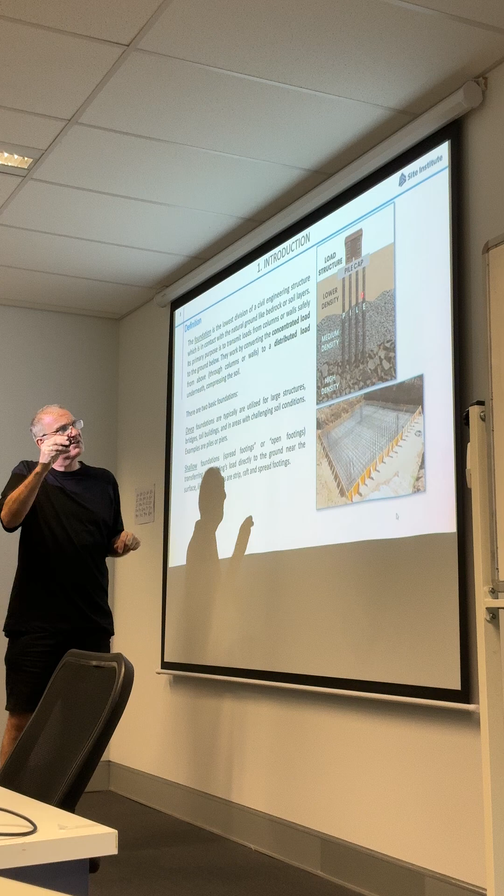And then this one itself is sitting on piles, right? And this one now reaches down to the ground. Why is that? Because when you talk about lower density, obviously when you build on sand, you know what happens with sand, right? It basically sags. It's simply not strong enough to withstand the weight. So that's the reason why you drill these holes down there.

You simply search for strong foundation layers. For instance, this one is a rock layer with high density, which is strong enough to withstand. Right? That's basically what they do with deep foundation. That's why they drill those pillars in there, simply to look for not actually soil, but mostly hard rock, and to embed your structure there.

So make sure that the load which comes from here goes all the way down through the ceiling, then through the column, down to the foundation, and then into the ground. The natural ground, of course. And of course the earth is big enough. If it's big enough, then it will hold forever.

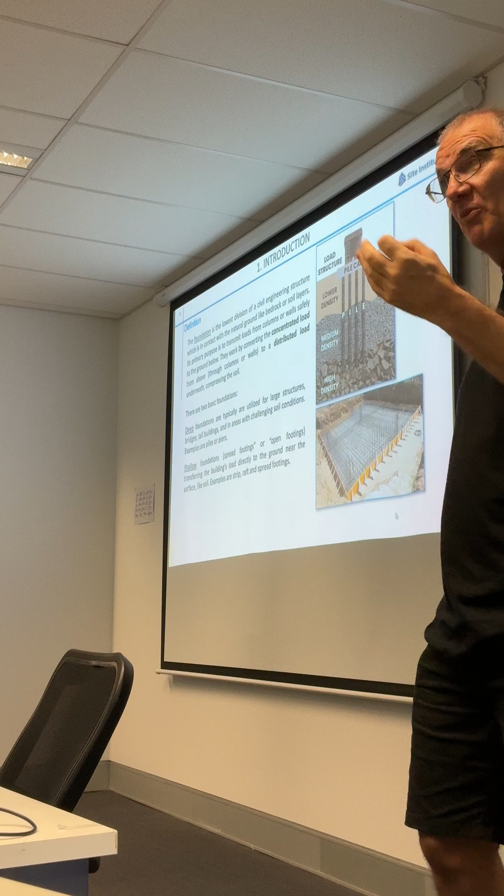I'm not sure whether you heard about that. I read the news a couple of weeks back about Manhattan in New York. There was some alarm raised that the whole bed on which all these skyscrapers rest starts to sink because of the enormous weight of all those buildings there. So it was in the news that this one actually starts now because of the enormous weight of all these structures.

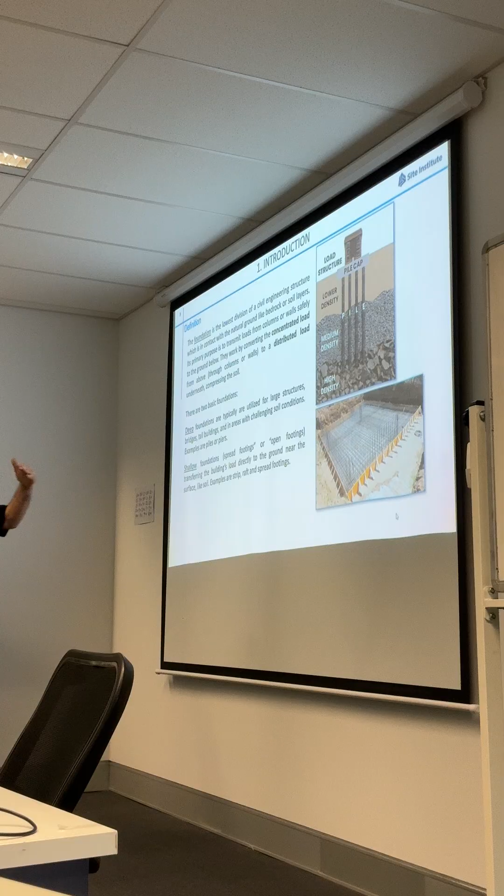And look at how densely it's built, with skyscraper after skyscraper, and they weigh a lot. And then it starts to push down the entire rock, the entire plateau on which it is resting. If you have only one building on a big area like this, it doesn't make a difference. But if you have many of those buildings, then of course it does. Because it pushes it down, on those pillars at the bottom there's a lot of pressure, because that's where the whole weight rests.

So it turns the concentrated load into a distributed load underneath. We have two basic foundations. One is the deep one, for large structures, tall buildings, and areas with challenging soil conditions. Here in Brisbane, I'm not entirely sure what the layers underneath are, but some areas are granite, and granite is one of the hardest substances in nature, which means it's very strong. So that's the deep foundation. We will not really be touched by it, because we do not have such deep foundations.

And the other one is what they call a shallow foundation, and the word says it. It simply sits almost directly on the ground, or you dig a little bit out, something like for a house, right? Or a parking space. I don't think you have any foundations for roads, right? I think you have only those pebbles underneath. So it sits directly onto the natural ground as it is. It doesn't have to be dug in. So you transfer the loads from the buildings directly into the ground.

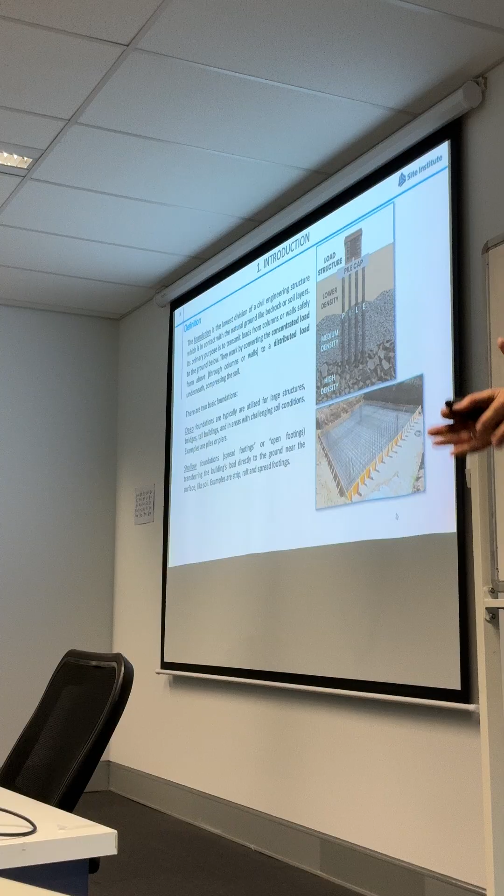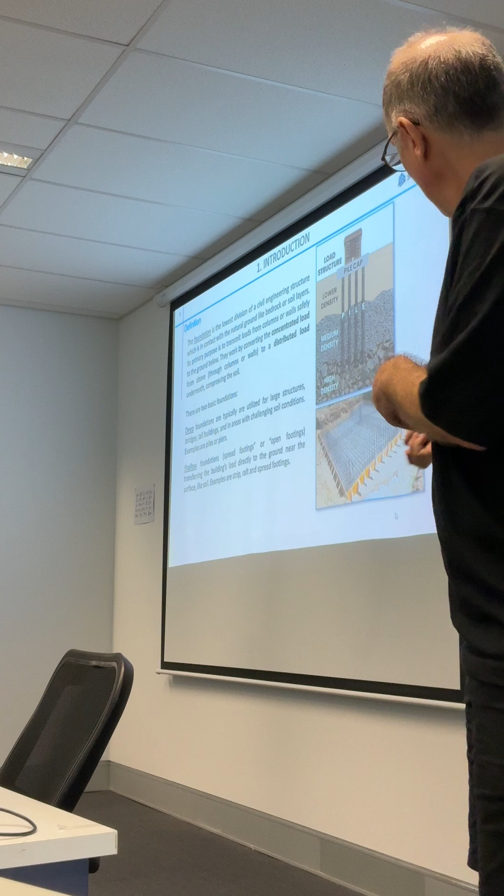And that's normally the surfaces. There could be soil, sand, the sand probably less, but any soil or ground conditions which are strong enough. It doesn't have to be rock. Because, first of all, the building is not heavy. A house, especially in Queensland, is simply timber, right? And the slab is wide, which means the load is distributed, which means the pressure generated is quite low. So you do not have really challenging conditions for the ground.

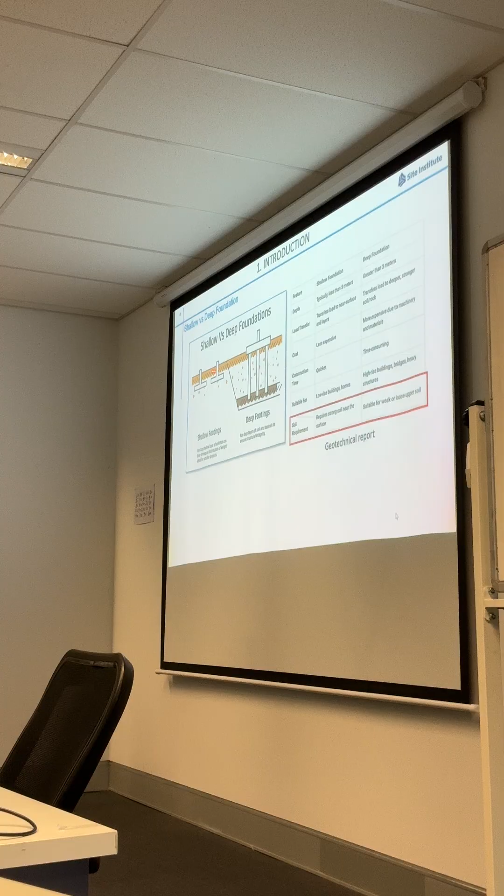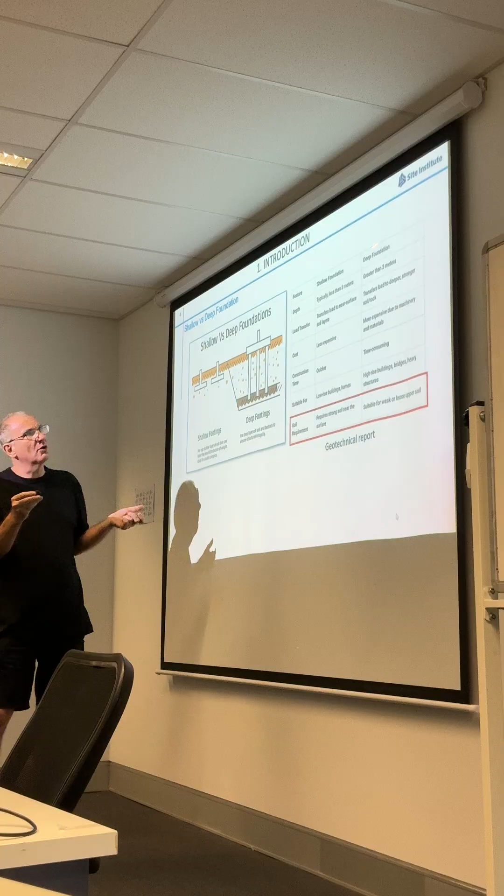So here are some comparisons between a shallow and a deep foundation. Of course, for the depths, for instance, when we talk about depths of less than 3 meters, that's what they call, I'm not a civil engineer, but what they call a shallow foundation, otherwise it goes down there. And the load transfer goes directly into the near-surface soil layers. Right? So it is mostly soil.

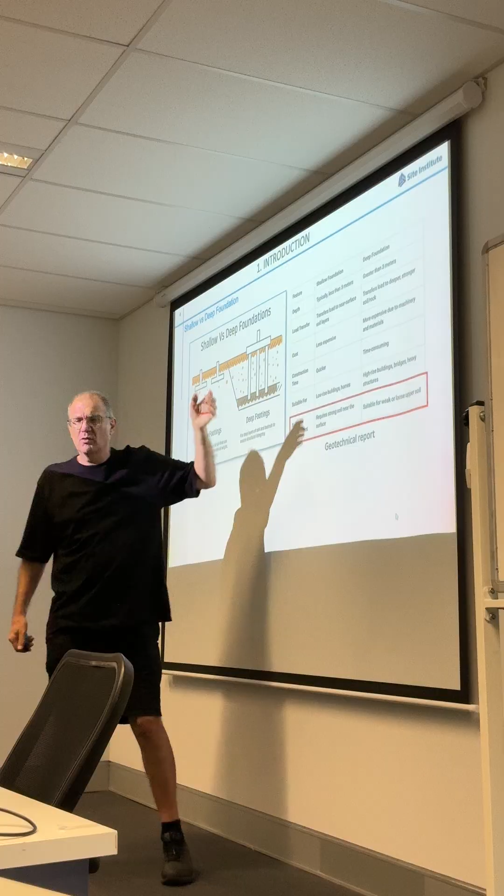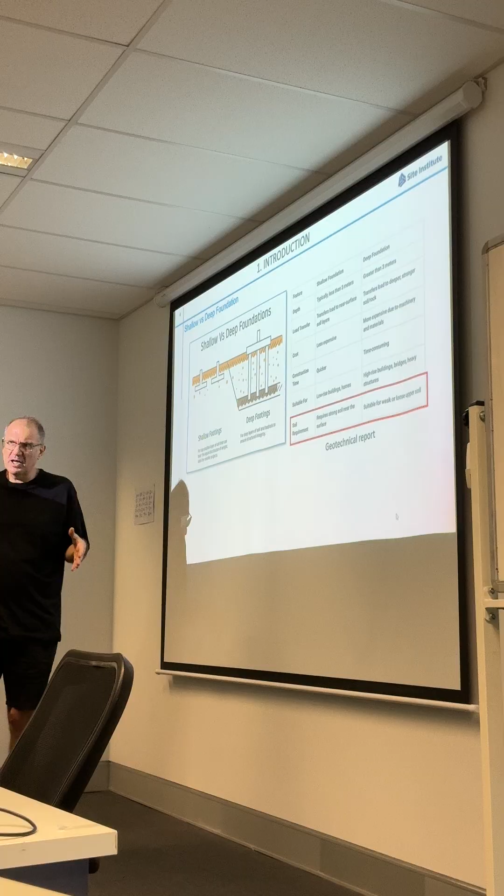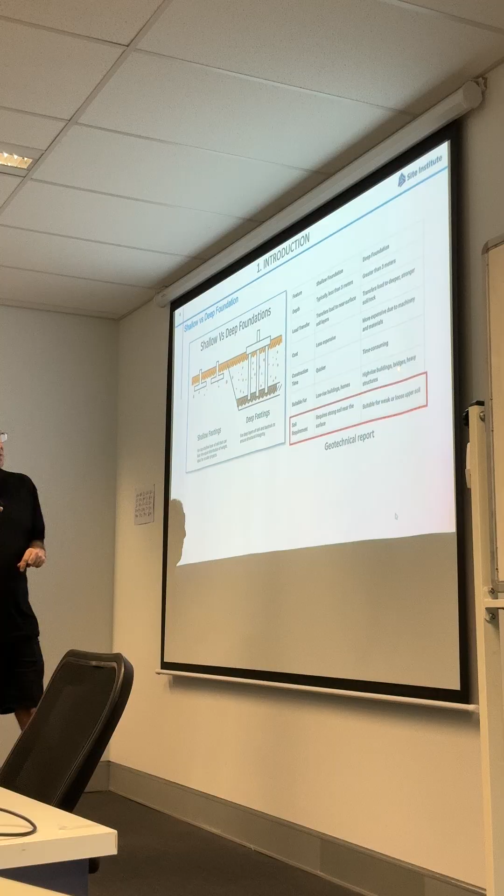And for the load transfer, that means simply from the top all the way to the ground, that is normally to rock, to rocky stuff, not soil anymore, because when you're deep down 10 meters or so, there's actually no more soil, there's mostly rock layers. Then the cost, of course, for going down is much higher. When you see the machinery you need to get down and how to make such a thing, it's much more expensive, right? And of course it takes longer because you have to drill these things.

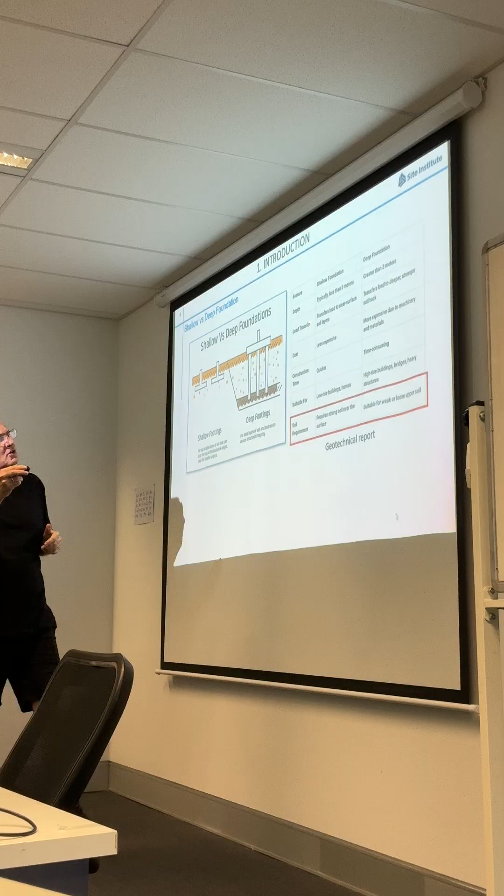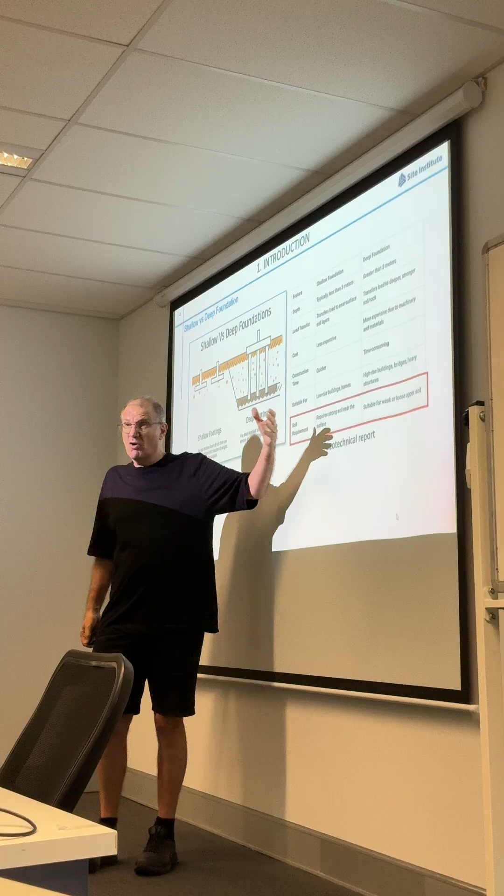Okay. So for the deep foundation, there are several types. Basically, one is the pile, which is simply a thing like this on which it sits. It's a slender column or long cylinder made of materials such as concrete, steel, or timber. I wouldn't have believed that they also use simple timber for the foundation, for such a pillar.

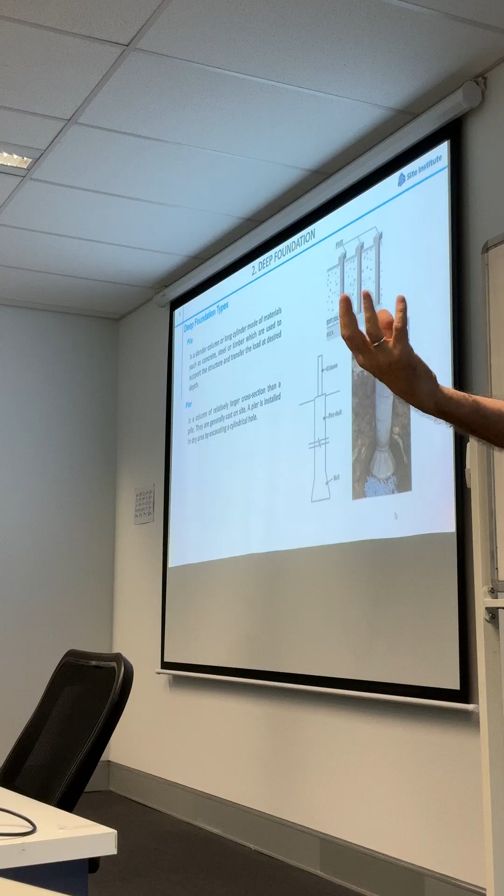And in fact, I saw them doing this here as well in Brisbane. I live north in Strathpine. They just redesigned the area, and they use some really hard timber, the timber which is also used for the electricity posts and the telephone poles. They're all made of this hardwood. This stuff is really hard. If you try to drill a hole into it, that's really challenging. It's really tough. And they use timber for making this.

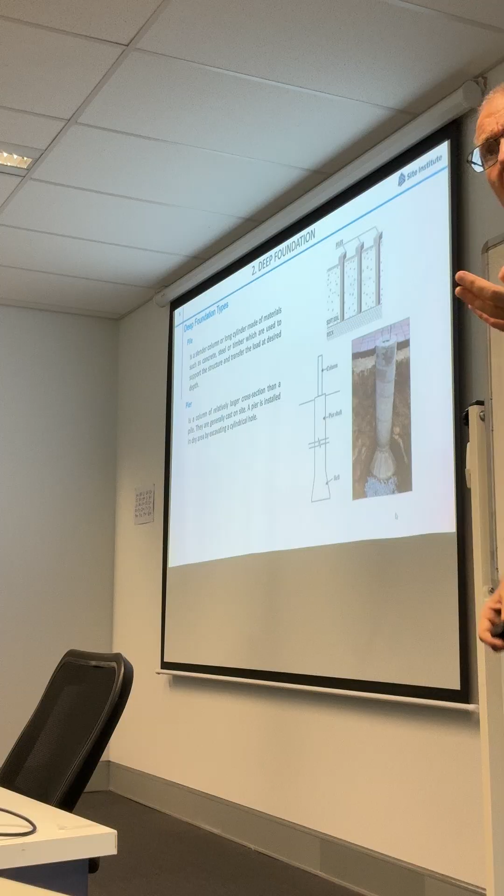Right. And it's simply because timber is quite resistant to water, quite resistant to corrosive soil, for instance. So that's sometimes why they choose timber. But otherwise, it is normally concrete.

Miriam was telling me that she did a project in Colombia where they built near the coast, where they also used timber pillars like these ones, because of the environment, especially near the water. Salt water is very bad for concrete and for steel, but for timber, it doesn't really matter. Timber is really, really resistant. You wouldn't believe it if you don't see and try out how hard that stuff is. It's amazing. This timber, especially in Australia, is amazing.

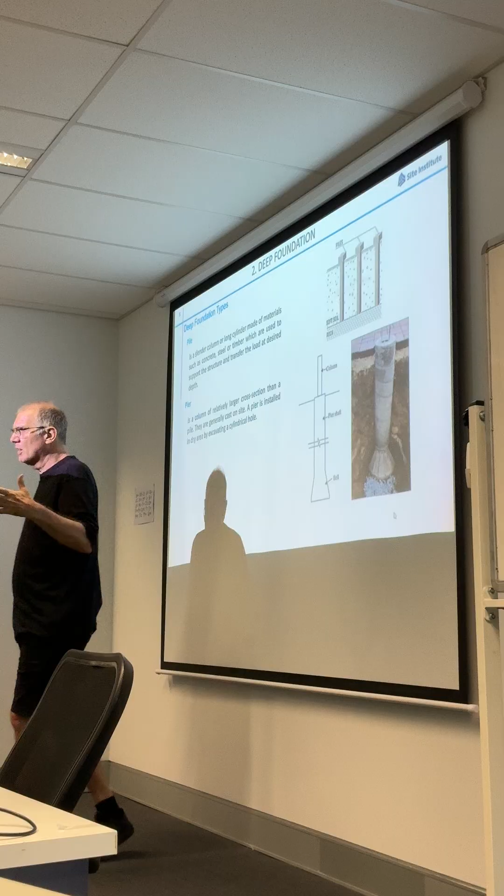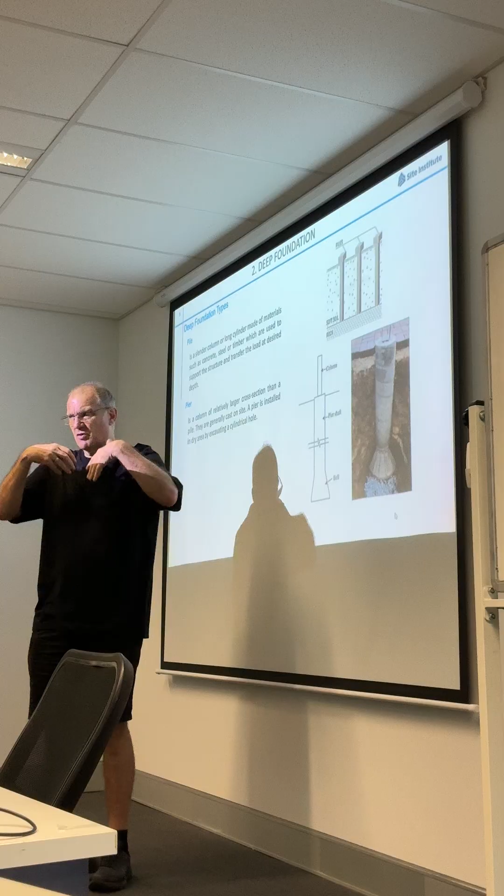So the pier is a column of a well, and the pier is like this one. This is a little bit more stumpy. And it has down here an area which they call a bell, and it simply makes the area underneath bigger. It's just to distribute the load which comes from above over a certain area, which means you reduce the pressure. That's the same thing as when you walk over snow, right?

I think I mentioned an example last week. When you walk over freshly fallen snow, you will sink in, especially when it's half a meter high. But if you wear snowshoes, which look simply like tennis rackets on your shins, you can walk over it barely sinking in. It is because you distribute your pressure, your weight, over a larger area. And that's what you see.

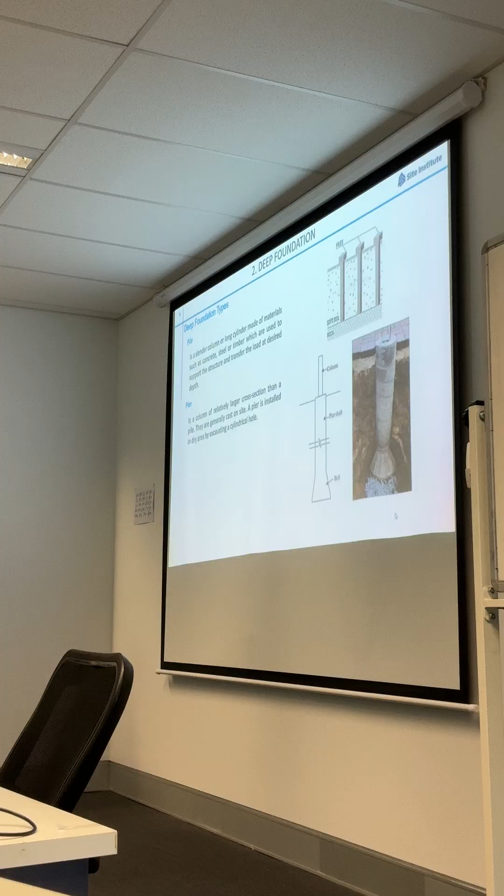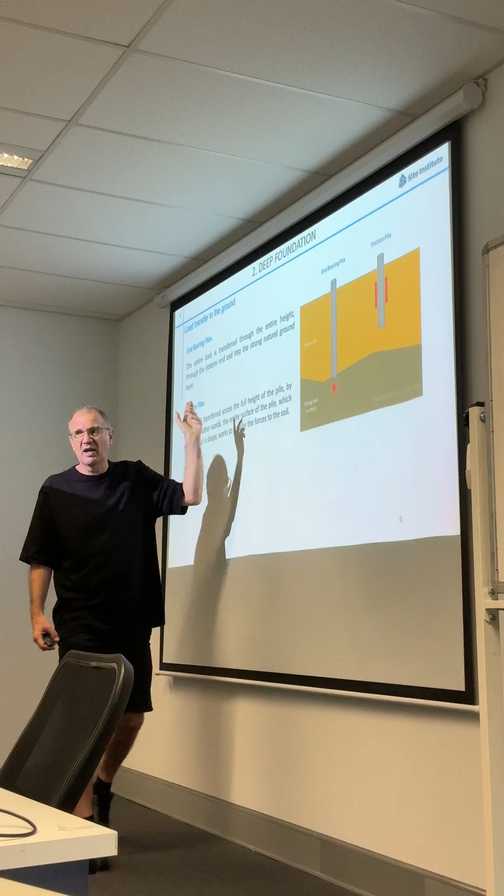End-bearing piles, that means simply the load which comes on the top here goes straight down to the ground. Basically the whole weight is distributed over this area, simply what I just said with the previous example. The entire load of the building above, or whatever is on there, is exactly at this point. And this rocky area, the soil, must withstand the load from above. That's the only area.

And another one is what they call a friction pile, where the entire load from above will be counteracted by friction on the side. It's simply like this, right? Because there's friction. So if I apply a load, it holds it, simply by the friction I generate with my hand in contact with this. Otherwise it would slip through, right? If there were no resistance, if it were smooth, then it would simply slip.

That's when you basically have weak soils. Then they have simply friction piles. They simply have something like this here, just to increase the friction.

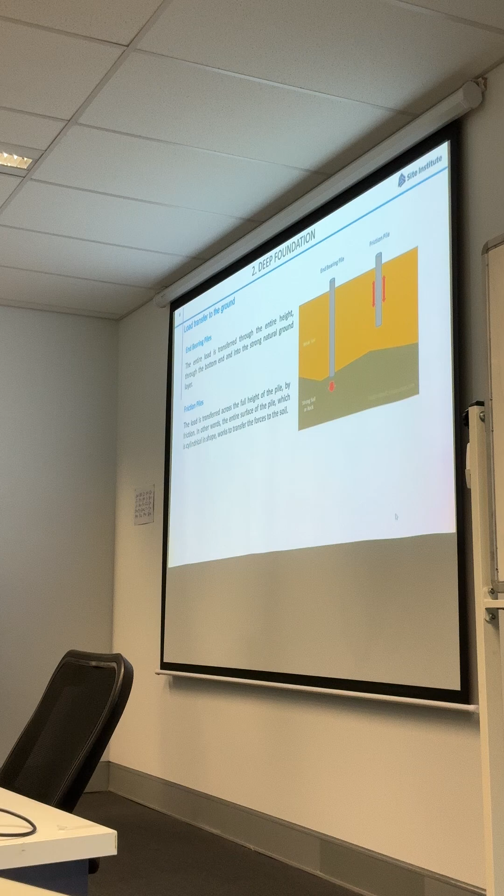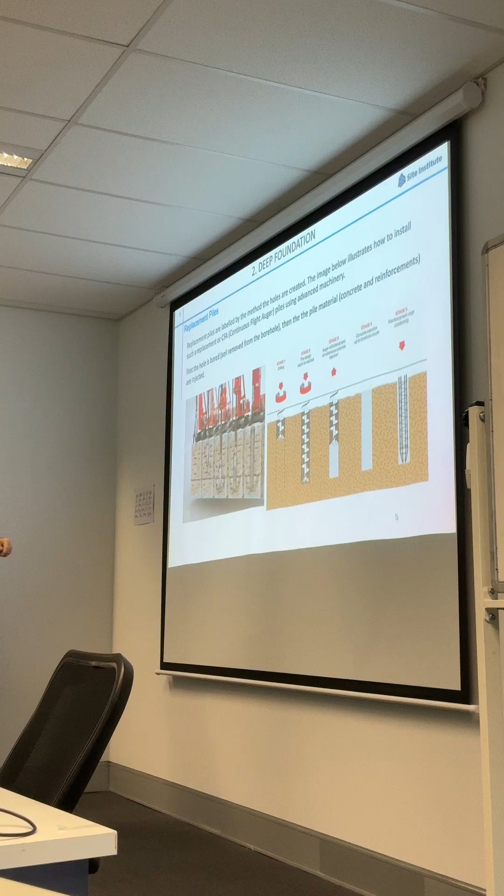Here is an example of how to actually create such pillars. That's a technique which they call CFA, continuous flight auger. This is an auger here, simply a big drill, right? And it's actually really cool to see those machines when they really go down. At the same time, when they drill it, they then fill the concrete, plus the reinforcements.

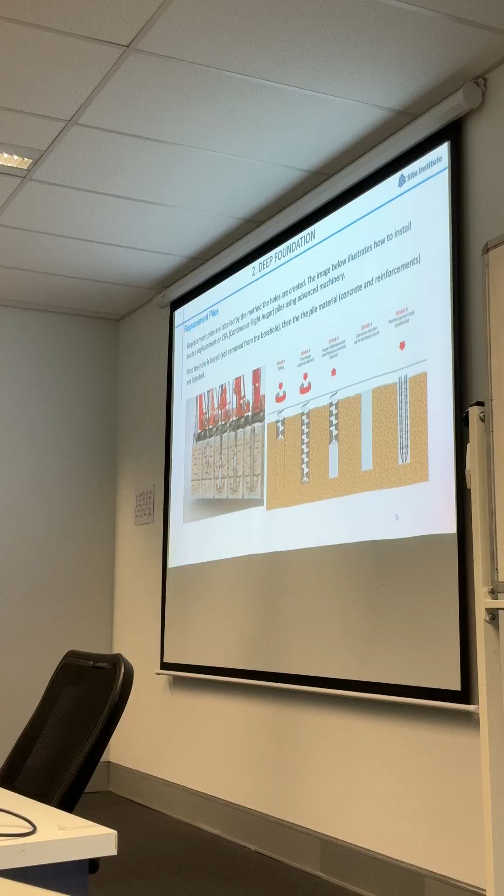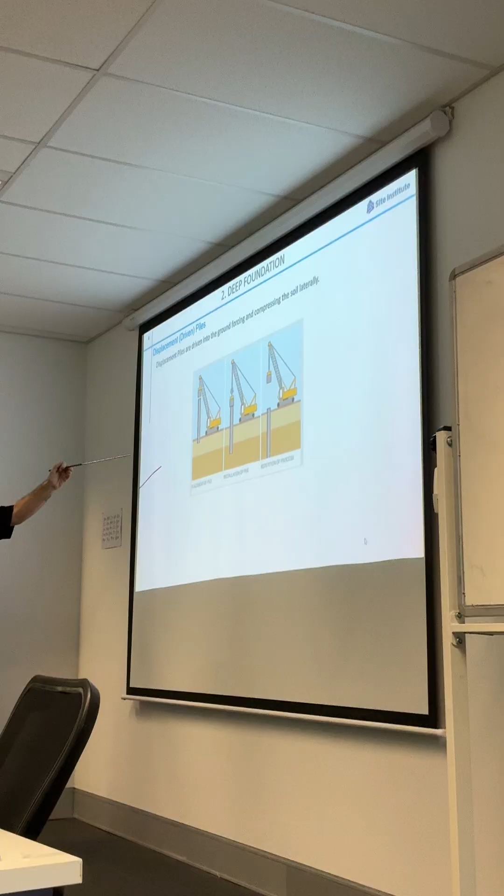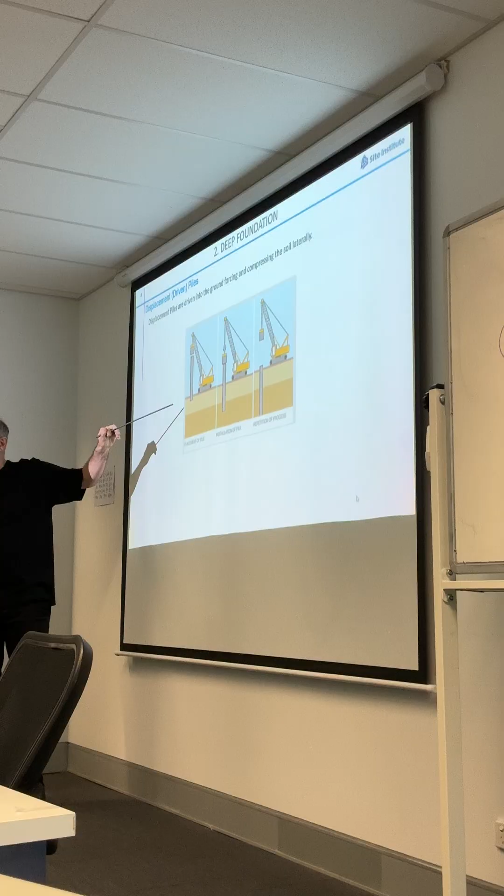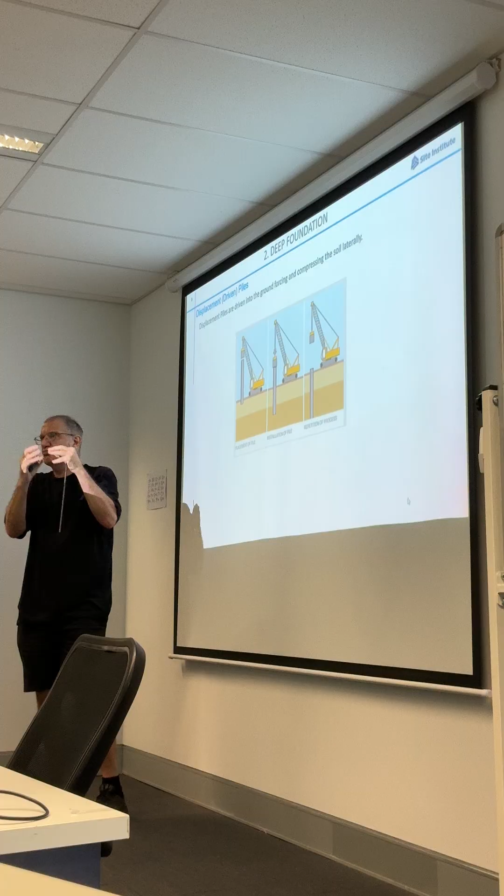Okay. And the other one is actually simply hammer it in. So either drill, which means you have to take the soil out and dispose of it. Here, they simply ram it into the ground. What actually happens is that the soil which was here is compressed to the side and creates an extra pressure on the pillar. Noisy as hell.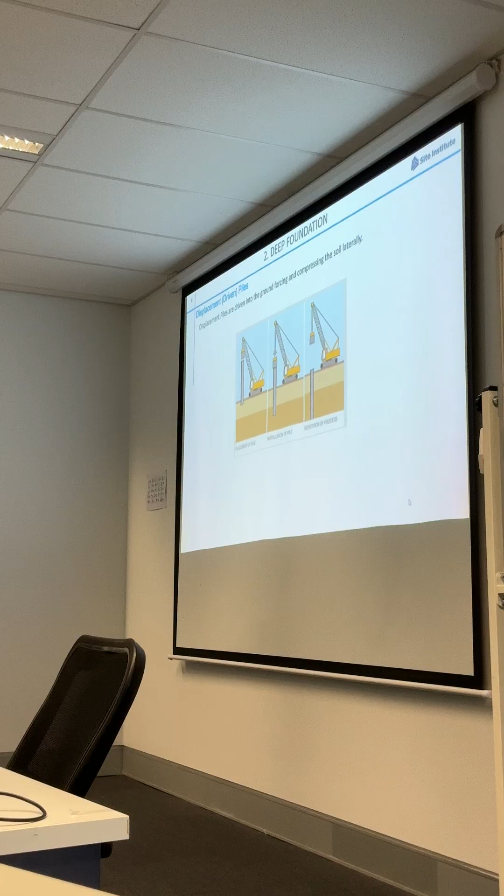When they need to create a support for the bridge in the water, they use this. They do not use a drill because of the water, they simply hammer it in. Right? Quite amazing. Advantages and disadvantages, I think we can skip this, because we do not go into deep foundations.

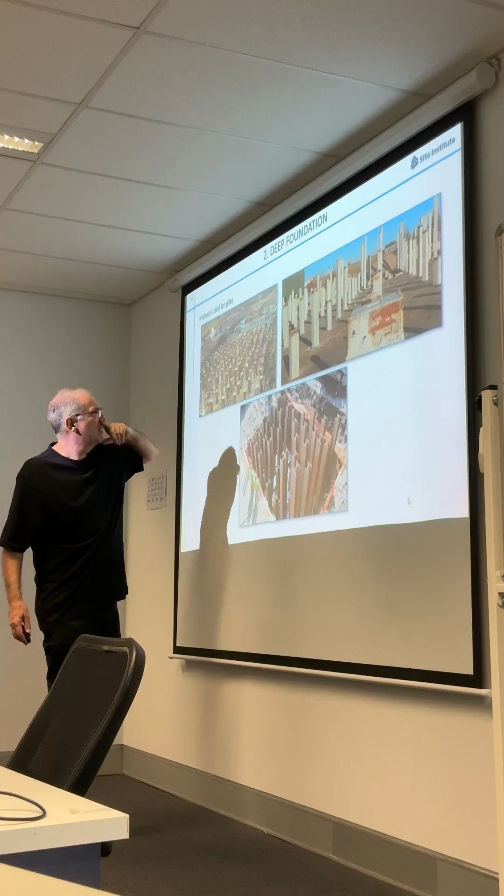So here's the material, that's at least something interesting. I thought at first it would be an AI fake or so. This looks very unnatural, but apparently it's really a foundation which they use. It looks fake to me, right? But apparently it's not. Here's the one I showed you, there's another one, a timber structure, and this is a concrete one. I don't know where they are, I just took them from the internet looking at different materials.

And here's the timber. At least you can see it's a mushy, swamp-like environment, right? And especially when you have salt water in that swamp environment, then you use timber. But that's all.

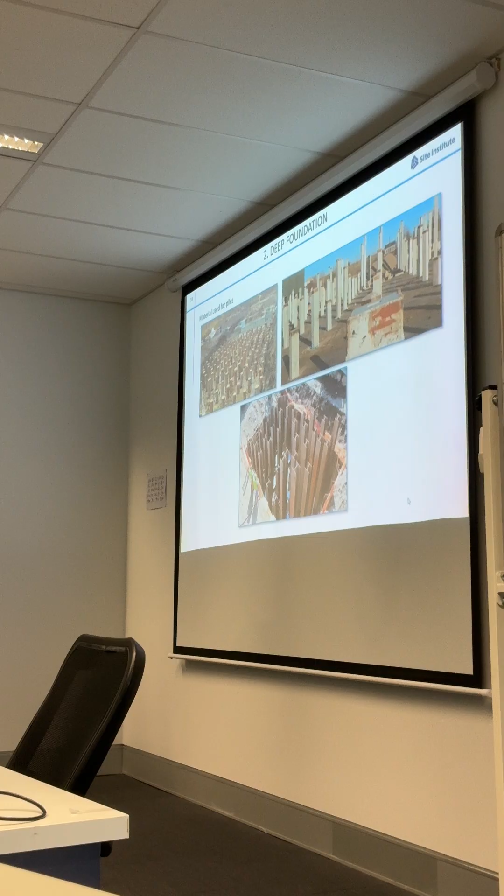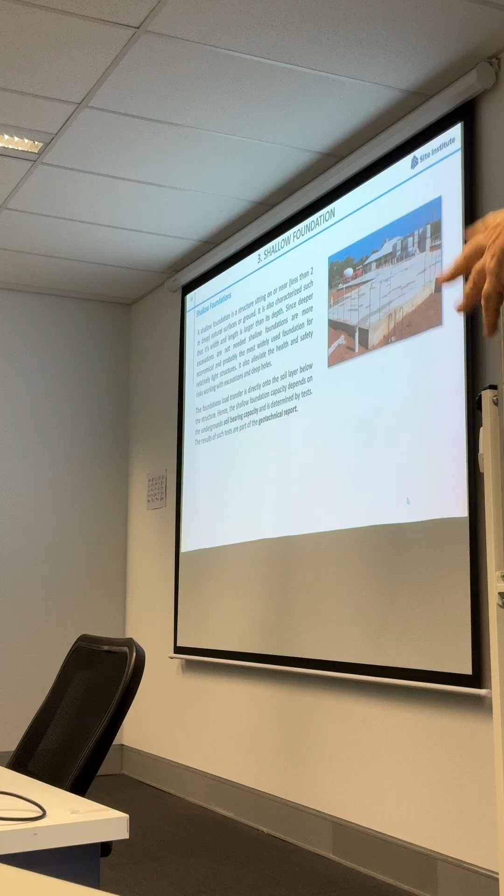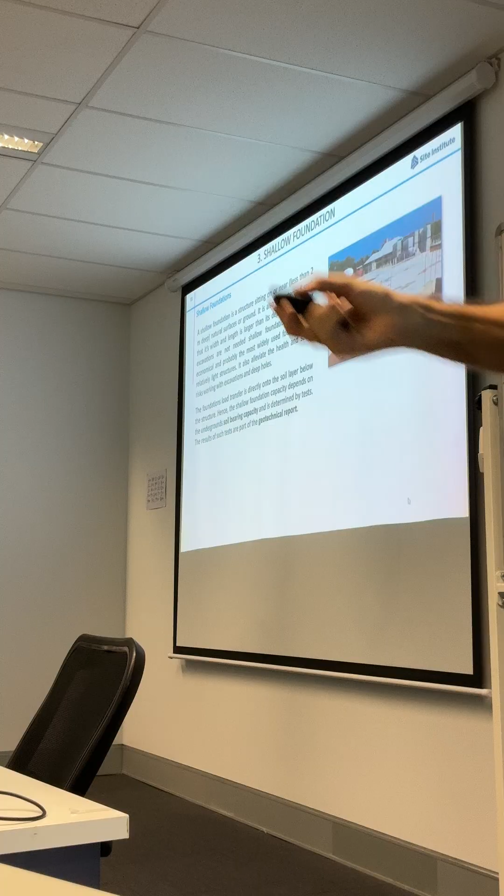This one is much more important for us. We call that the shallow foundation. The shallow foundation is a structure sitting near the surface. It is characterized in that its width and length are much larger than its depth. Makes sense, right? That's why it's called shallow.

Again, this is quite boring, I know, but I have to tell you because one part of this unit is about health and safety. When you have a shallow foundation, you have to dig it out, but only to a certain amount, so that is much less risky than a deep foundation. You might have heard about accidents with deep excavations, not shallow ones. So I just have to mention that so you are aware of it. It is economical and probably the most widely used foundation.

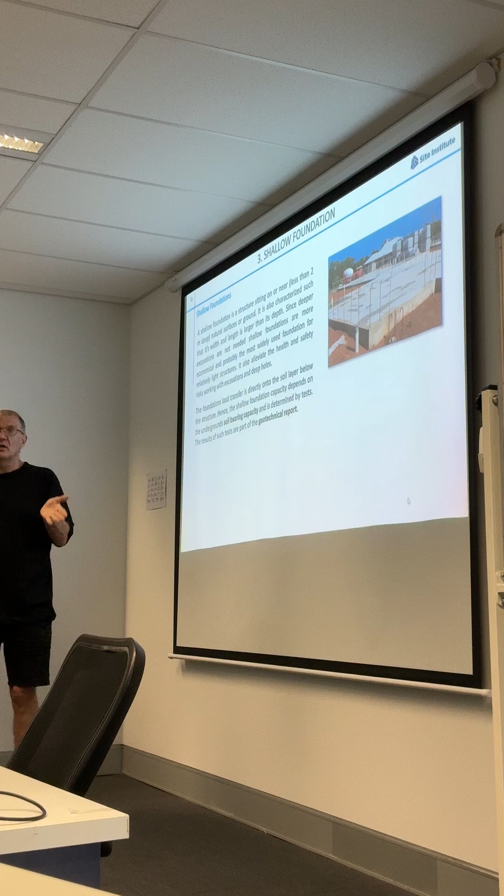The foundation load transfer, that's the first word, load transfer. Basically from our building to the ground. The transfer into the ground, that's the point. How do we manage it such that it is reliable and stable? And that depends on what they call the soil bearing capacity. That word is the most important one, dominating this module.

Each soil we build on, rock, sand, clay, whatever it is, has a certain soil bearing capacity. So please remember that word, because it is part of your task 1. And where do we get that information, the soil bearing capacity? That is done by tests.

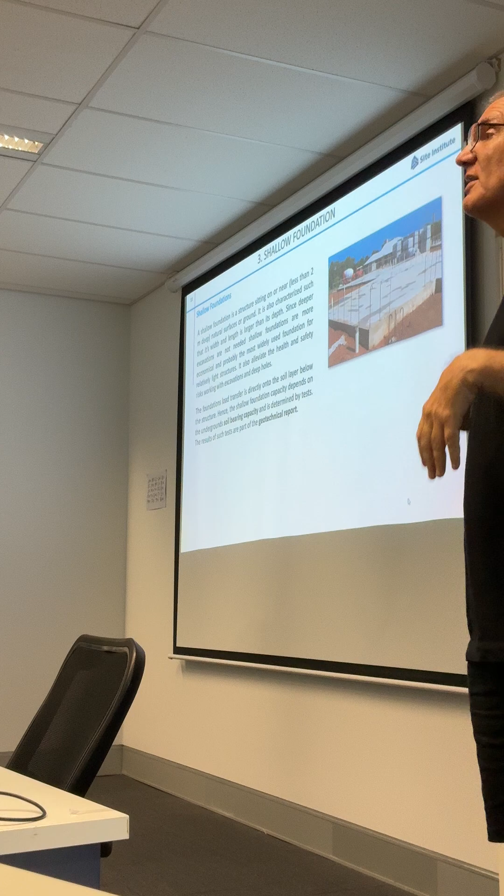When you go to a construction site, they always start with a geotechnical report, a geotechnical survey. People actually go there and drill holes into the ground and get soil samples, to determine the composition of the ground you want to build on, and in the end to find out, for instance, the soil bearing capacity.

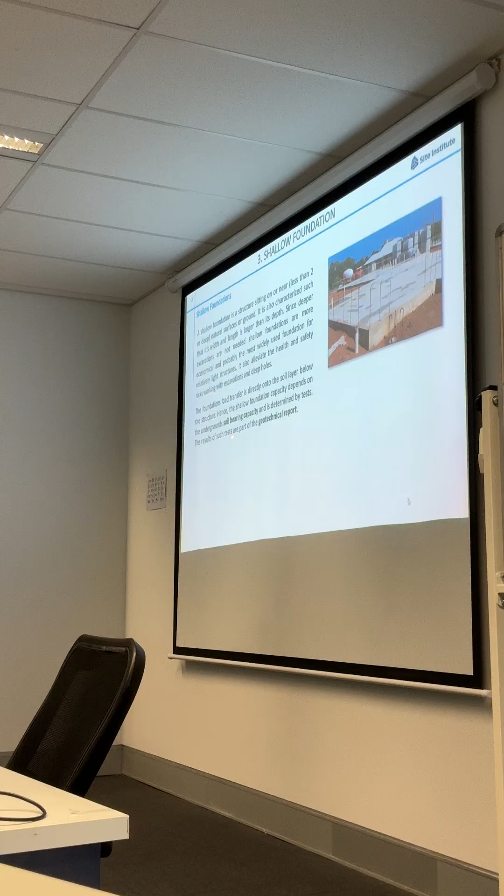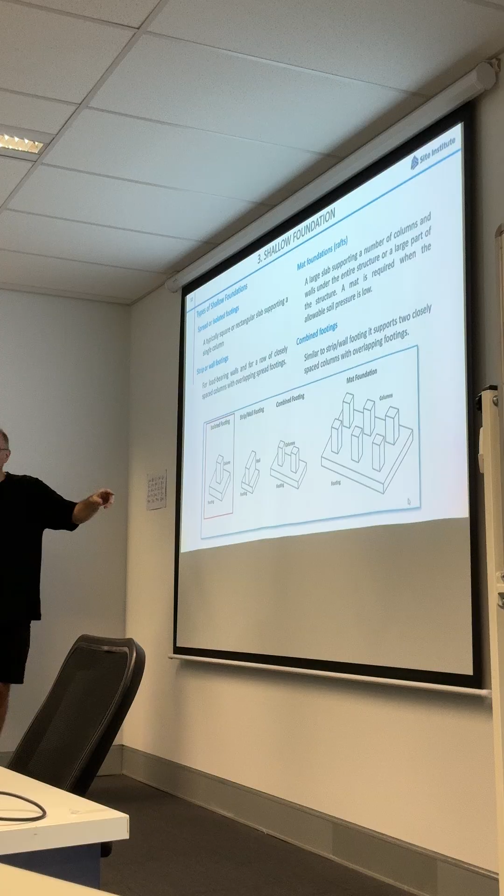Okay. Such a test is part of the geotechnical report, which is in the next. So now again, this is basically more clear and nearer to the project we're going to do, and also with one of those tracks we are going to do. We have basically types of shallow foundations. The first one, and that's probably the easiest and the simplest one, and that's the one which we also consider in the track, is what is called a footing.

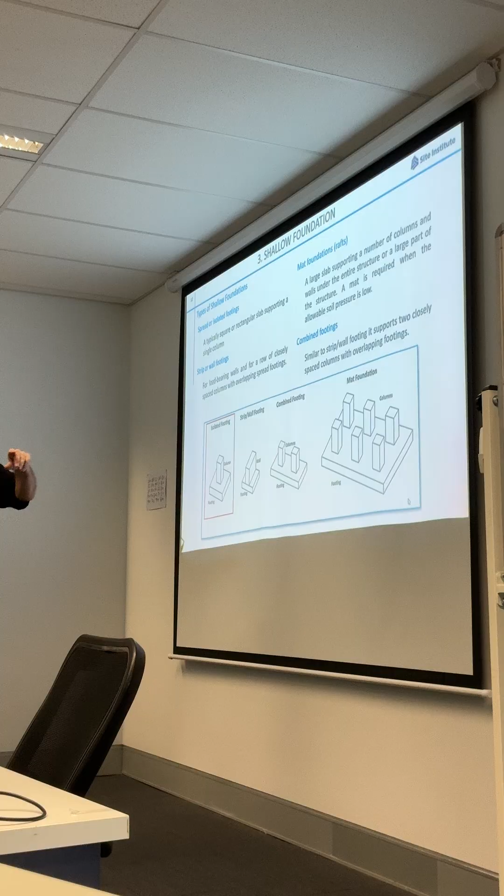A footing is simply a slab like this on which the column rests. The column we talked about, that's why I've drawn it like this. This is the basic example of a footing. The column sits on that footing. So the footing comes always with this little square or rectangular area. It's very rare that it's round. I think I haven't seen any round ones, but this one, and a little stump on top of it. And on this the column sits. Okay. It supports a single column.

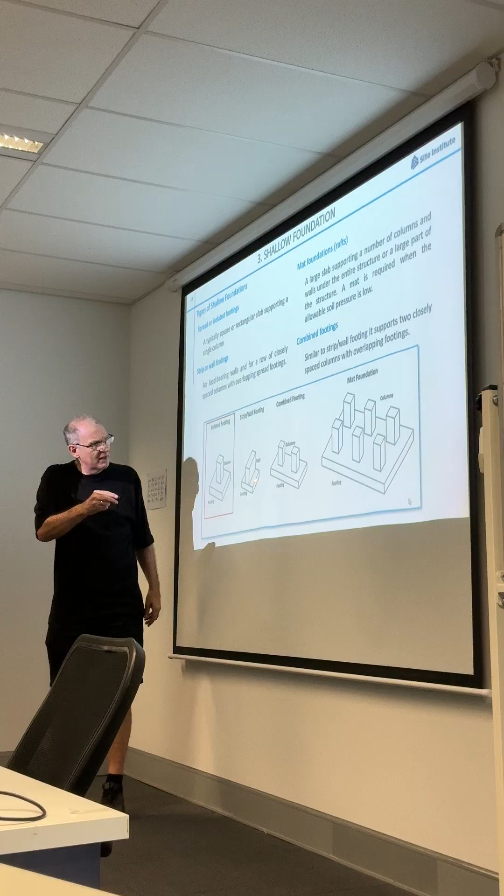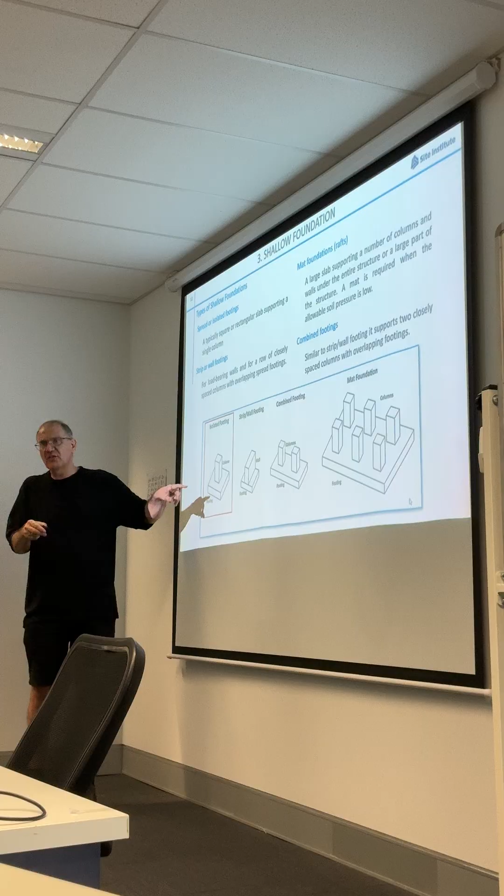The other one is a strip or wall footing, and that is simply, for instance, for a house. Right? So you see a wall on this one, and underneath sits directly that slab, which basically follows the wall altogether. Then there's a combined footing in which you have one footing on which you share more than one column. Right? You can see this one here, compared to this, it is simply more economic. And moreover, this one here has a pressure which is lower, for instance, compared to this, because the area is larger.

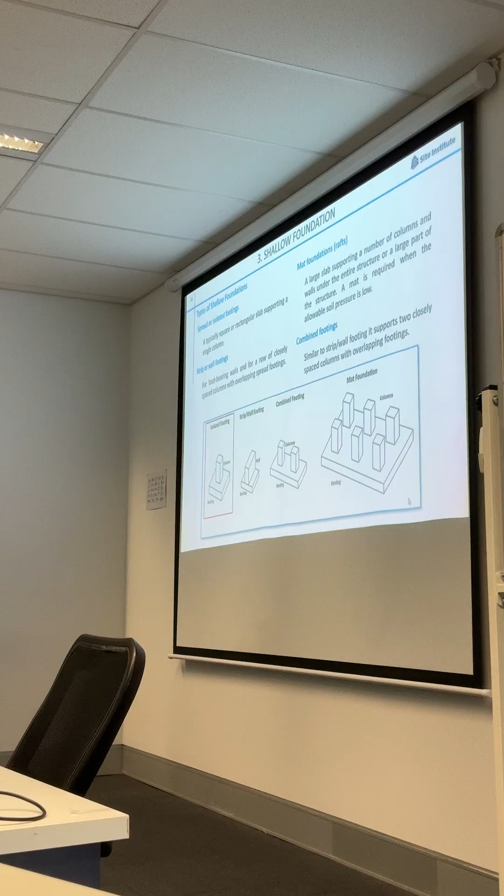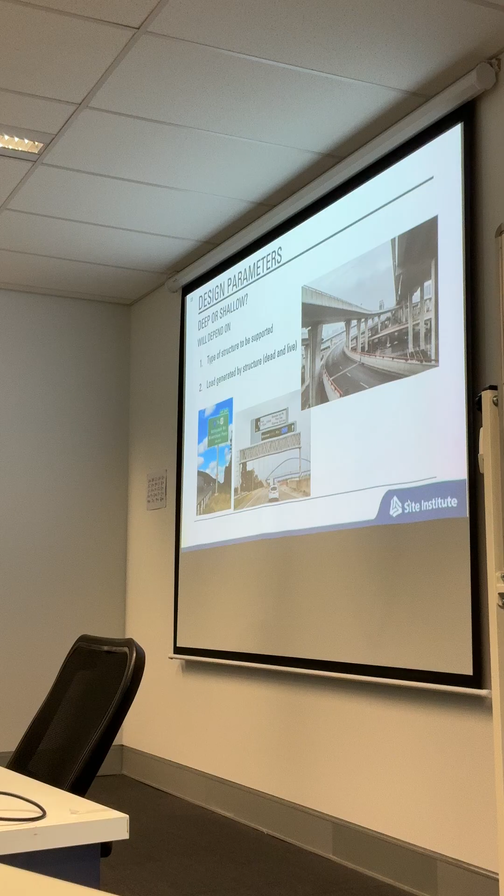I see everyone is following, which is okay. So here you see that's one of the old slides, which I simply forgot to change. I think I need to delete that one actually. I simply forgot to delete this one. Delete.

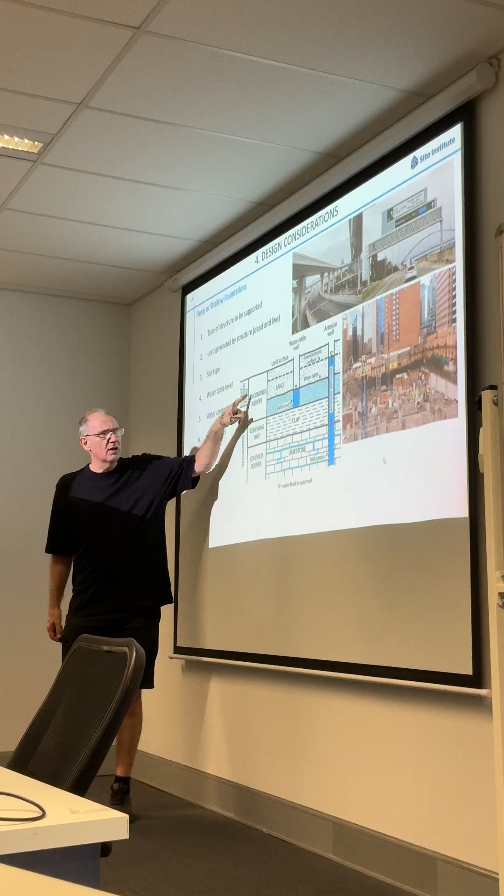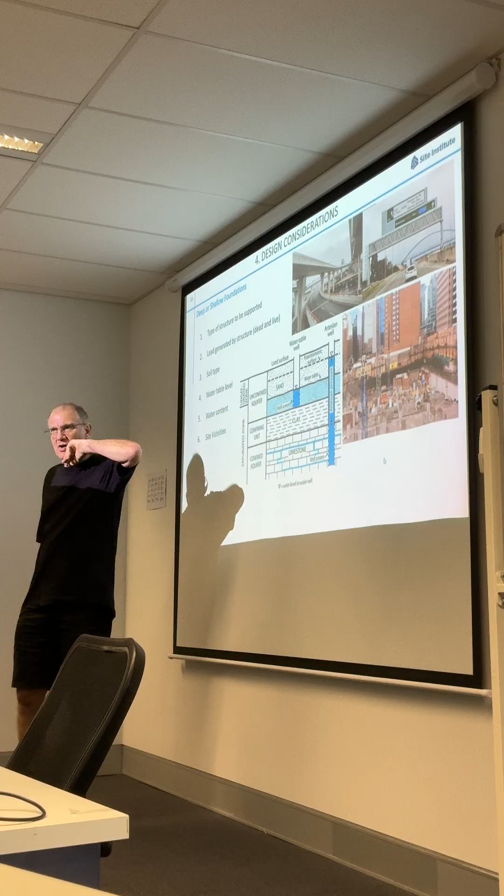So now the question is deep or shallow. I do not want to go into the discussions. It simply depends on where you want to build it, the ground conditions. One of the problems here is water in general. Groundwater, salt water when you're close to the water, and in Australia you also have the artesian water basin, which is one of the biggest water areas underneath, right? That's what they call artesian pressure.

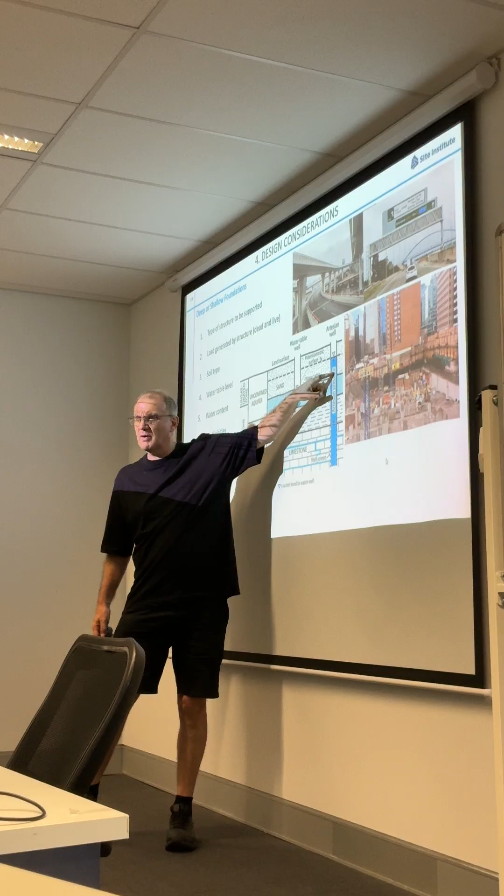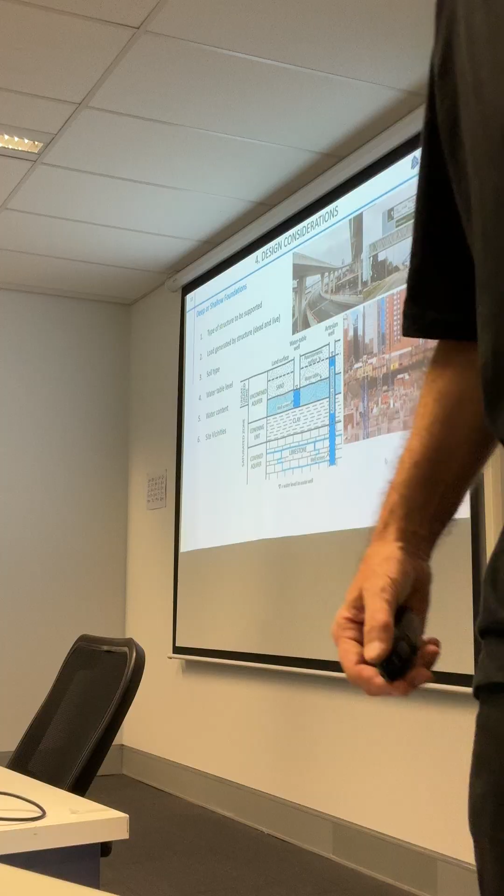Right? You know that Australia is probably one of the biggest water reservoirs underground in the world, and also one of the oldest. Right? The artesian basin. It's basically half of Australia underneath, right? It's water. If you check it out, then you will find it. It's really big, very ancient water.

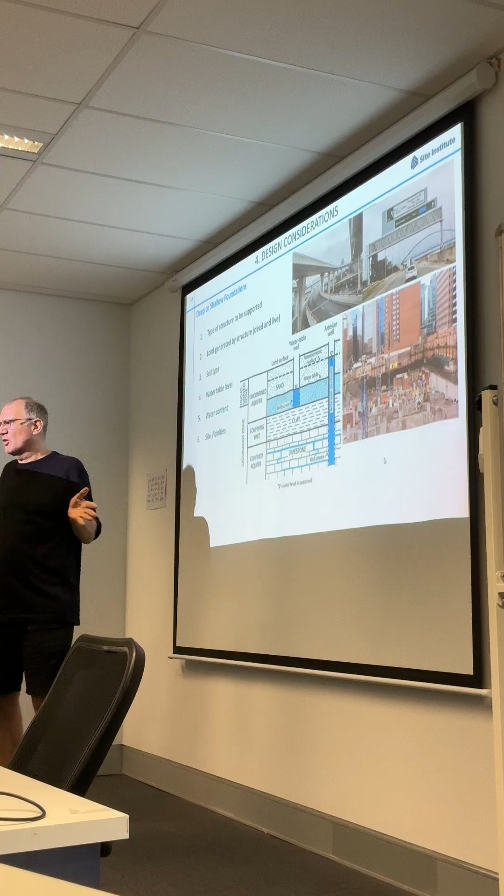So you basically look at the soil type, whether it's clay or whatever soil you have. Water table, water content, and of course site vicinities. If you have something like this one here, you are simply confined in space, and you want to build, to dig in. Right? You cannot simply spread out for whatever reason, which means you have to go in. So it depends also on the location. You do not make that choice. That's what the architects do.

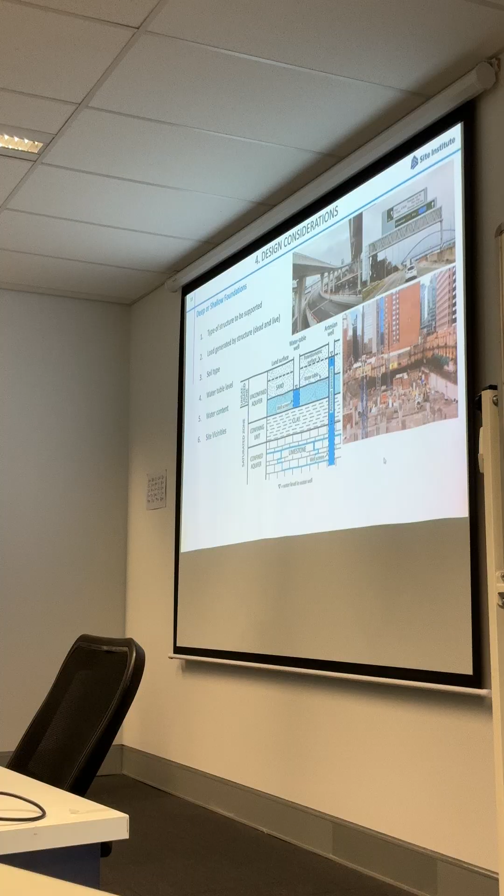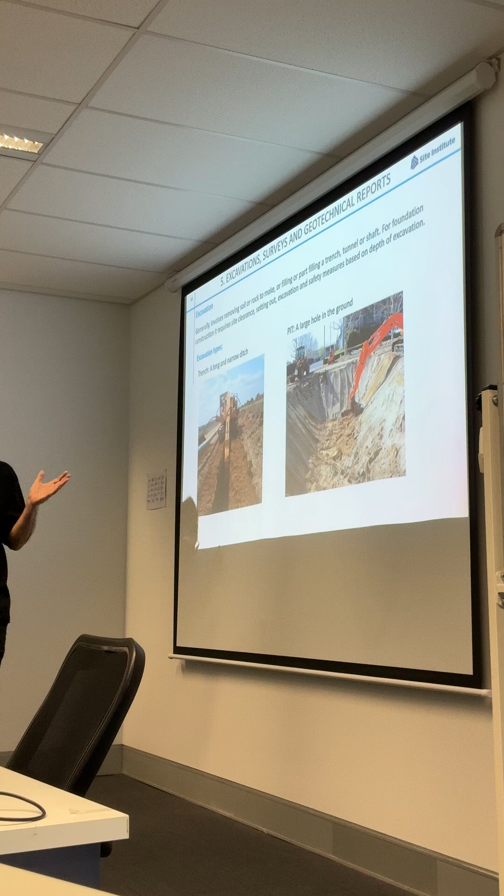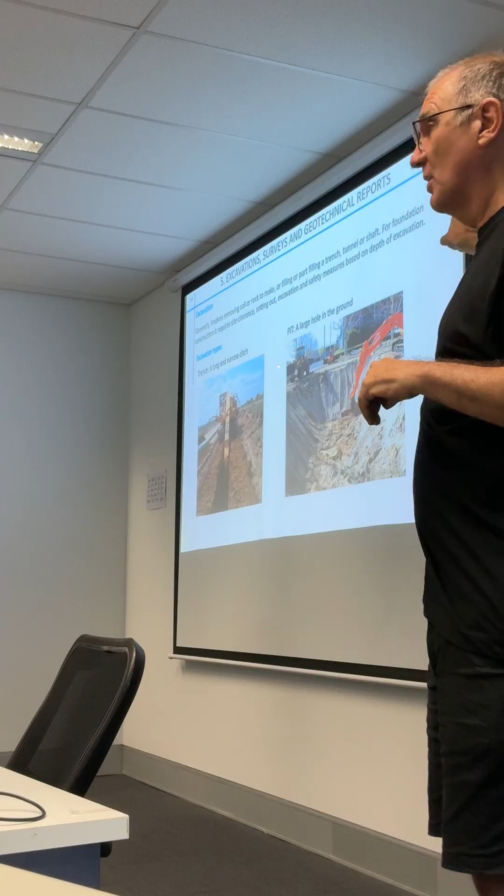Excavations. Again, I do not know why I have to bring this up here, but it is part of this track, part of this requirement. So roughly there are two types. Either you create a big pit, which is simply a big hole, right? Like this one here, a large hole with a slope up there. And the other one is called a trench, where you simply dig narrow but deep, for instance, for pipes. So this is a long and narrow ditch, normally not that deep.

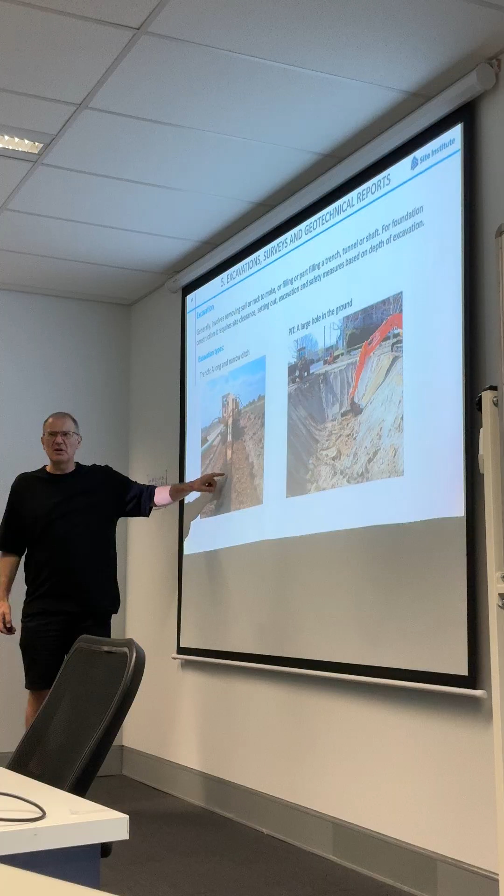It's simply because of geotechnical structures, for instance, like irrigations or what is it actually? What are culverts made for? We actually did this last term. For drainage, sorry. Yeah, that was the word. Sorry, I'm a bit tired this morning. So drainage, something like this.

Right? Of course, here I have to mention health and safety. For a hole in the ground, especially when it's deep, it's very dangerous, of course, you can fall in, right?

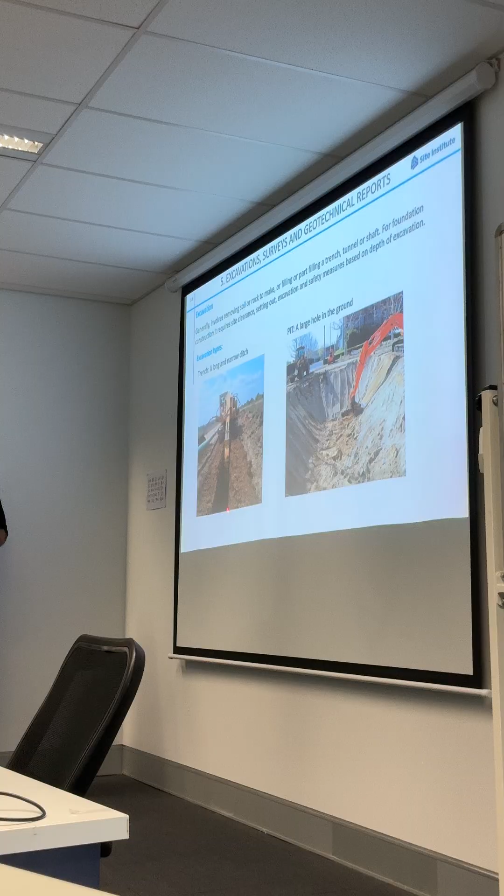And I'm not sure, you probably heard about the story, especially in Germany. It's a story that's indeed true. In Germany, there was a person who, I do not know whether he wanted to create a swimming pool, so he dug out a big excavation in the backyard, on his own property, and fenced everything, right? So he dug it out, 2-3 meters deep or so, and then overnight he went to sleep, and then a burglar came over.

So he climbed over the fence, because it was pitch black, and he fell into the ditch. And he sued the owner, and he got compensated, because the owner did not fully secure the excavation. German laws. I remember that there was really a big outcry in the news at that time, that this idiot, with the full intention to do harm, fell into the ditch, got injured, and got compensation because of this.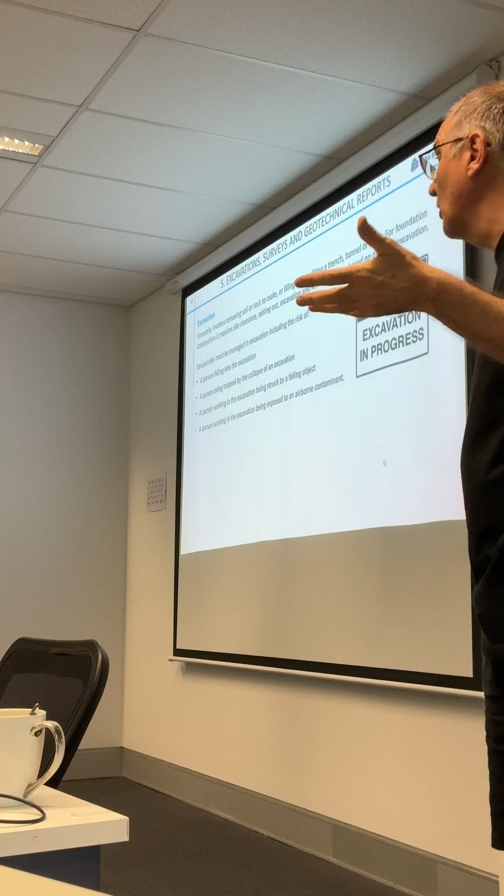Right? At some stage it makes sense, especially when you have some sort of hazardous environment, because you might not be aware that when you work in an excavation, you might be exposed to airborne contaminants. For instance, when people dug in asbestos, because it's invisible, or the fine dust settled in the lung, and you might not be immediately aware of that, right? You are always exposed to contaminants out there because of the fumes, and Brisbane is very dusty anyway. So that would make sense, but this one here, you are legally required to put up.

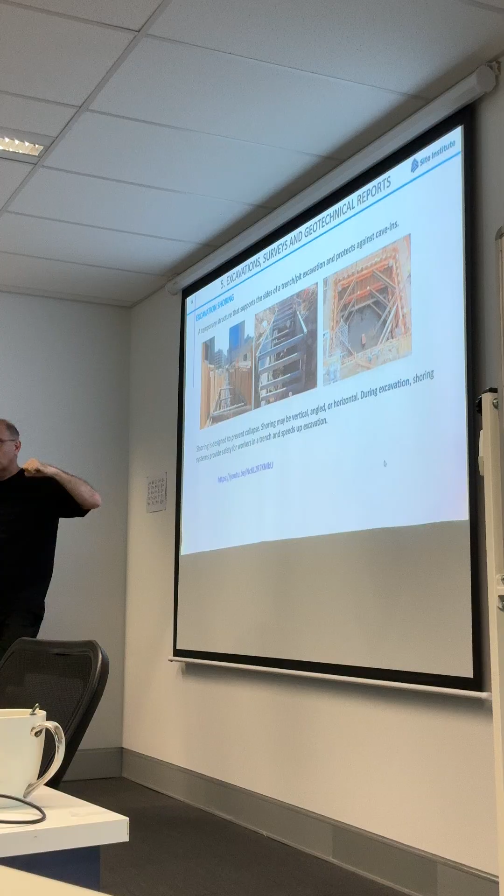So these are the possible scenarios which could happen: people could fall in, the walls could collapse, and they could be stuck inside. And that's why you have these ones. I'm not sure whether you heard about the word shoring. It is simply something like two plates here, kept apart by jacks. They use jacks to push them apart, so that the soil on the side cannot collapse. I'm pretty sure you have seen this somewhere.

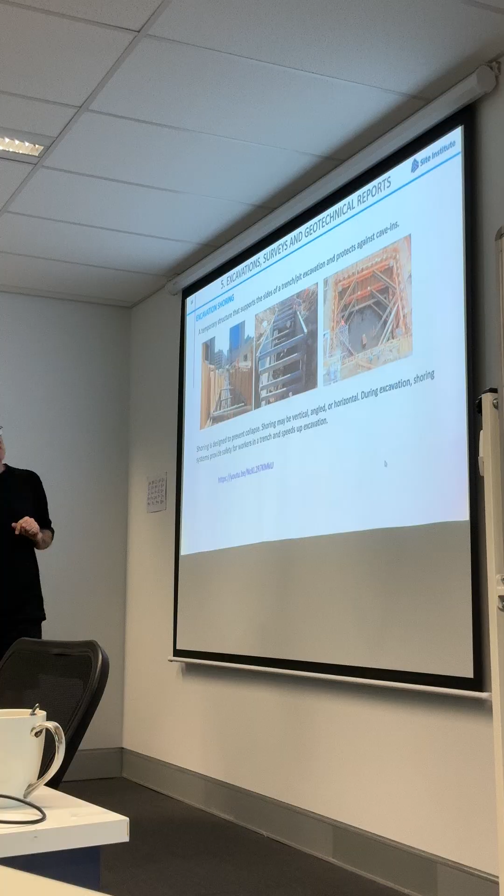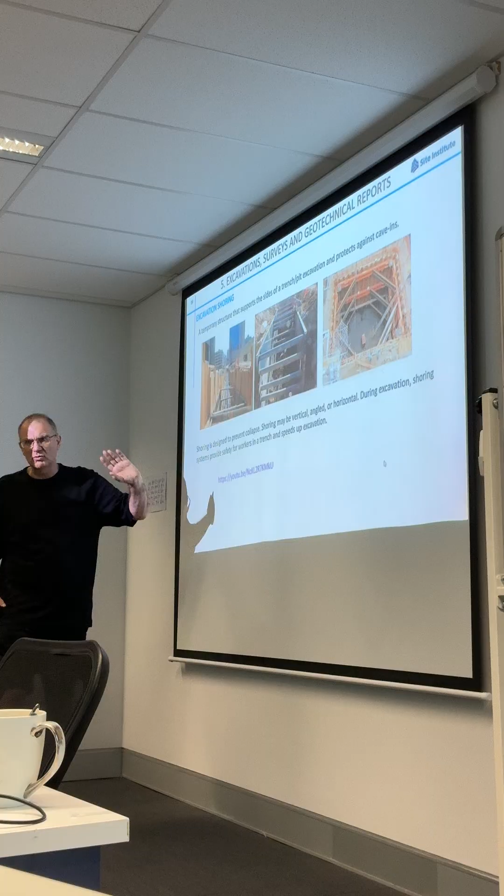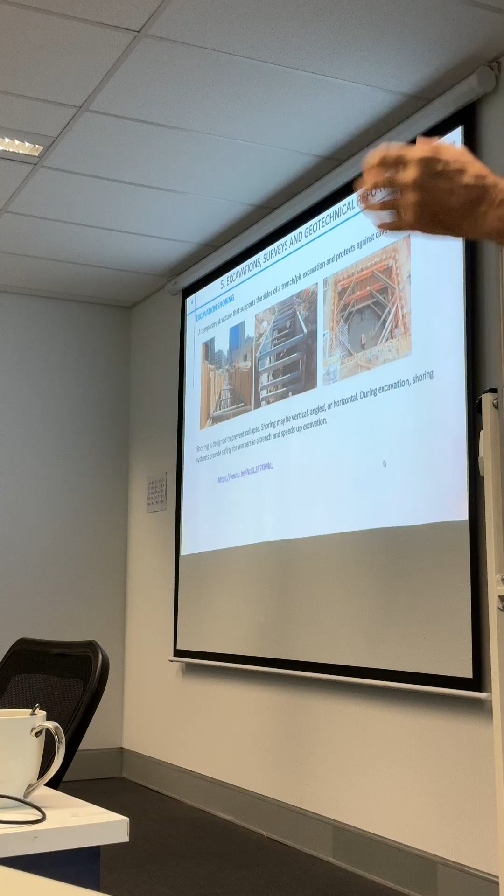And here for the big construction site, you see that's quite a big construction effort, because the soil condition might be too hazardous. So they use what is called shoring. There's also a video up there which I do not want to show you. It's an Australian one, it's actually quite good, and explains a little bit about shoring and what you need to look after. But I think we can skip that because it's not really relevant to our plan.

Now we are homing in on what we need to do for the first crack. And I do not know why this has been brought up like this. This is from the original slide owner.

Before we actually do any construction, first of all, we have to find out what is the soil condition. That's why they do surveying—those surveyors with their laser equipment, basically to make sure they have measured out everything. It's also a legal requirement for the councils, when you build on a registered location at a particular height, and so on. I'm not an expert in that.

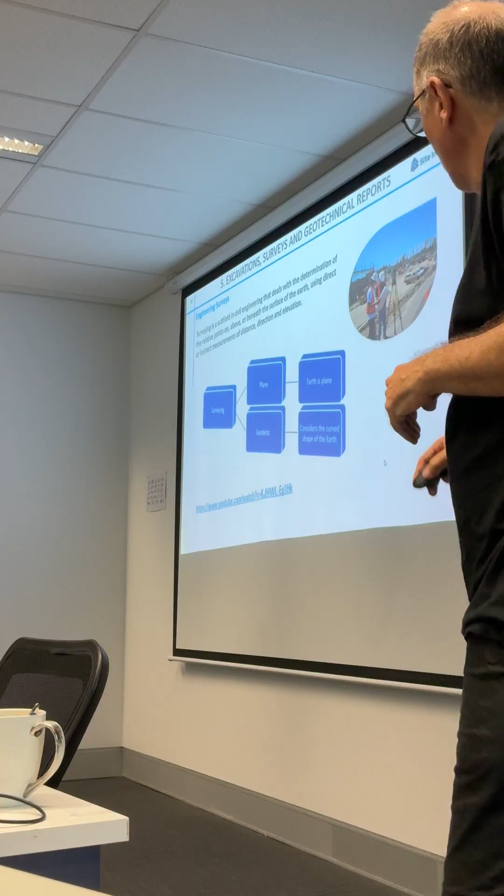There are two types of surveying, simply because of the scale. You have two conditions: one is called the plane one.

There's no flat earth people here, right? I just have to mention that because it's still amazing to see people that believe in the flat earth. But in fact, the earth is flat on a small scale when you look at this stage. So for our sites, we always consider our area as flat.

But when you do road design or larger structures—I don't even know why you'd need this for construction here—they typically consider the Earth as a sphere. That means all those straight lines are in fact curves.

I cannot imagine this, except if you want to build a road from here to Darwin, straight through—there, of course, that makes a difference whether you consider it flat or curved. So I don't know why they use this, but that's the purpose of surveying.